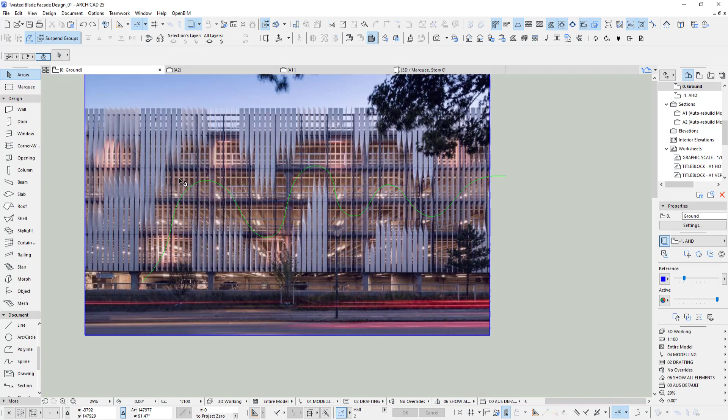The other thing is, you see I made sort of a spline wave. You can see that the facade really has a bit of a wave design. It means it twists in different stages, or twists in different positions. So that's the other challenge we have to look at.

Now I start up with showing you here, I've got a car park design just sort of ready. Very simple cars in it, just really to represent the car park. Now, if I look at the elevation, that's where we add this facade.

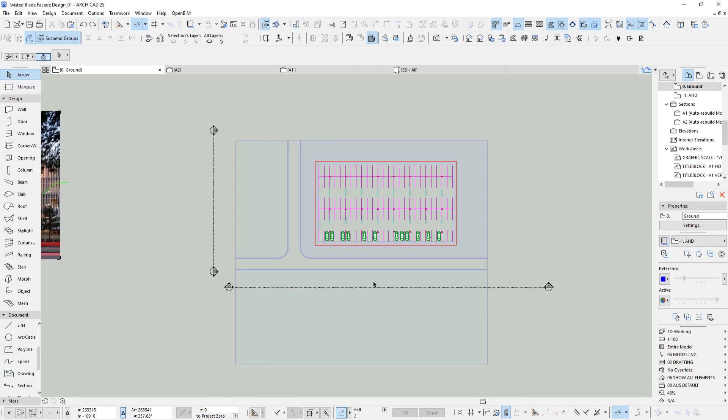Alright, cool. So to start with, I'm showing you how to twist a blade. Let me do the first blade. For this, I use the morph tool. The morph tool, the material for now, I do blades, and I simply start drawing.

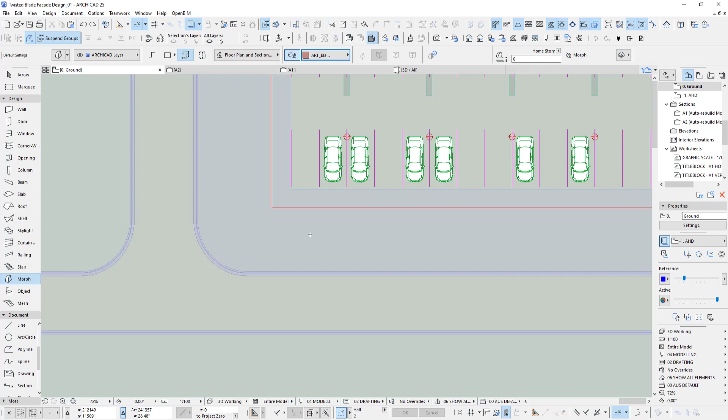I'm using this tool here. This gives me a height when I draw this morph object. Now the blades are roughly, I had a look, 400 millimeters long, and I make them 50 millimeters thickness.

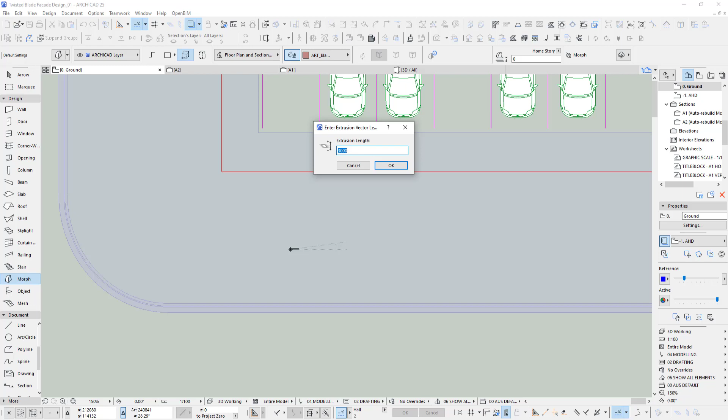So let me start drawing. I click, I go X 400 plus and Y 50 plus, enter. And now it comes up with the extrusion length. I estimate the twist to be about 3 meters. So I put in 3 meters, there you go.

Now let me go back. What I mean is the twist starts roughly there, and it starts twisting, and it's probably stopping around here. So that's about - you know, I made it 3 meters. Obviously it can be different, but for this purpose of the tutorial, I made it 3 meters.

So let me now frame this, so we only have this blade in 3D.

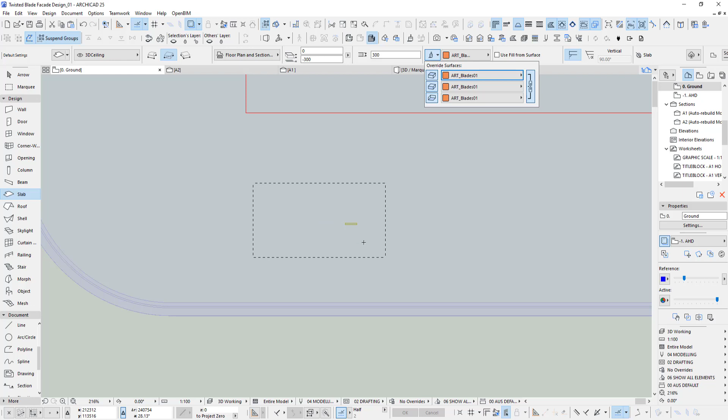Before I start drawing, I'll show you how to twist this. I drew another piece with a slab - let me do this. I go and use blades 01. You will see, if you watched my tutorials before, it's nice to have different materials - it's easier to explain. So I'm just drawing another piece here with a slab.

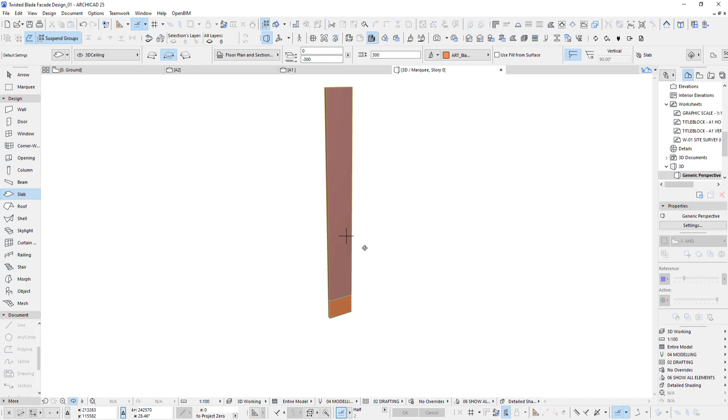Okay, and if I go into 3D now, we've got 2 pieces. I don't have to be too careful about how high that slab is - it's just connected straight down here. Now, this piece of morph, how can we twist this?

You have to go to your arrow tool up here, you change to the other arrow here, and then we go and select this. So this is selected here - it's just really that it's the surface of that piece that's selected, nothing else.

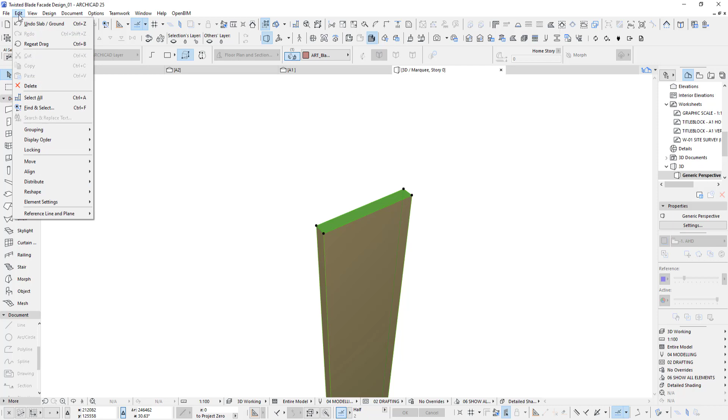Now, if you go and want to rotate this, you can go here, rotate, and you go in the middle here roughly. I'll show you - so you go there, click. I click, let me go straight here, and we now start to twist this.

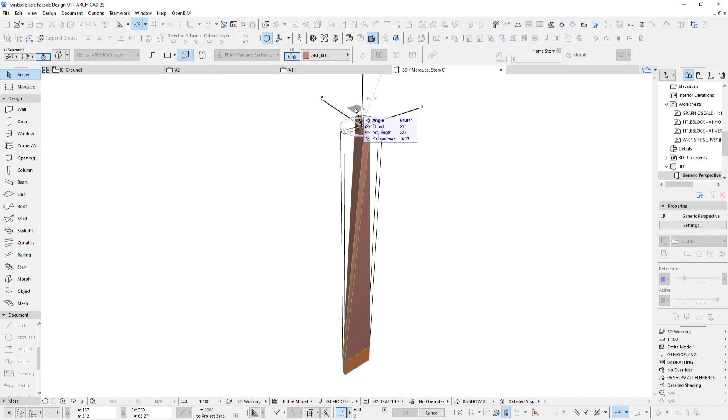Now what happened is, you can see if I twist this, I need to be able to twist it 90 degrees, so have a look what happened to it. Let me click again - that's just roughly for now, because what I want to show you is that it is not working, right? This is not working at all. So how can you make it work?

And to make this work, there's a little bit of - it's not a trick, it's just something you have to add. You have to add more vertices. So let me go back, and instead of selecting this surface, I select just this one line.

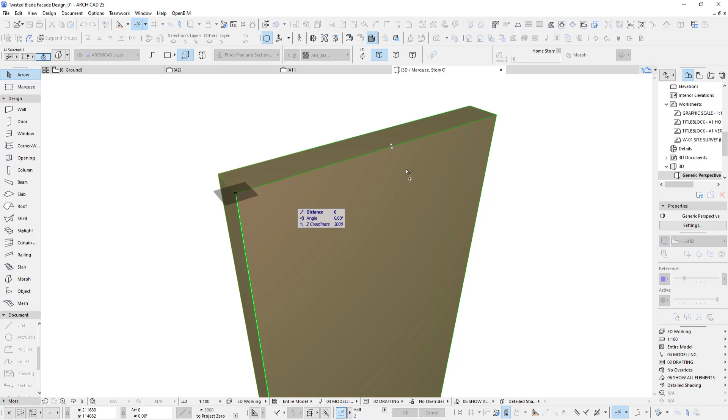Remember, you have to be in this arrow tool to do this. So I click this one, and now I multiply this line. Let me distribute - put in about 25. I don't need to pick a part before, so click OK. So I pick from this corner, it'll be distributed all the way over here, and let go. So you click again, twice actually.

So I've got all those extra vertices on this side of this piece of morph. We need to do the same on the other side, so let me do this quickly, zoom in.

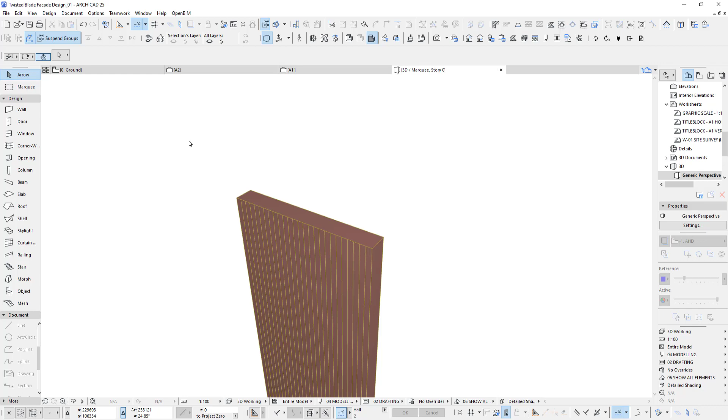Okay, now because you got all those extra vertices in here, we can actually select this surface again, and we can twist this. So let me rotate from the middle roughly, going there, and now if I move... let me just stop there for now and click again. Have a look what happens. It is actually able to twist this quite nicely.

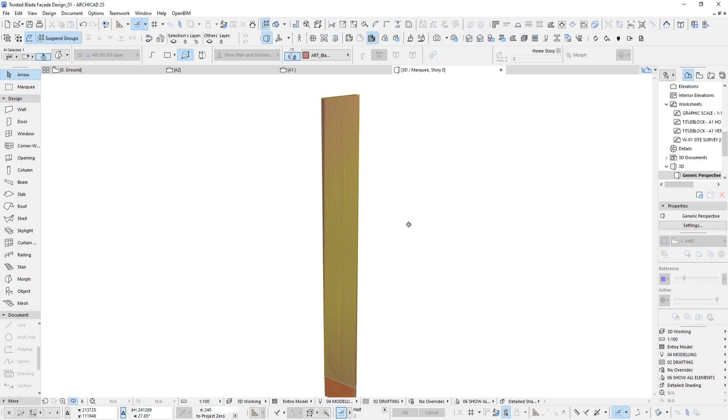Okay, now let me undo this step because we have to be more accurate in twisting. I'll do this in 2D, so I'm going back and zoom in a little bit. I'm still on this arrow tool, and I just click here to select the surface.

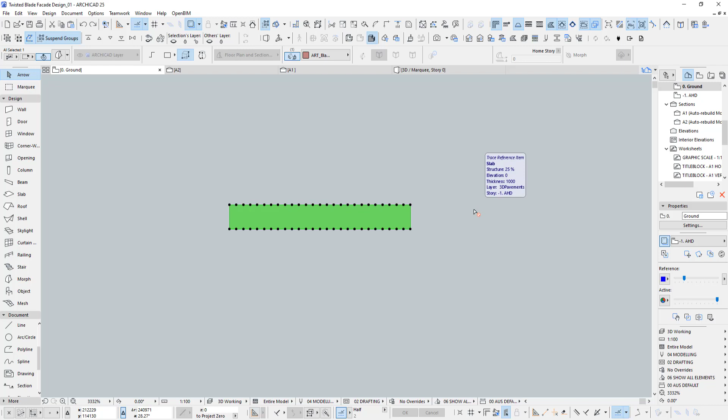Now to be able to be exactly in the middle, you would have to have the divisions we got down here. Where do I have my divisions down here? Yeah, see there it's in half at the moment. But okay, I have 25. I'm not sure anymore if this is actually really the half here. I think it is, but to make sure, let us deselect this.

And I go to line. That's the middle now. I go there. That's the middle now. And now if I go under this line, you can see, I definitely can see the middle here now. All right, so go back to the arrow tool.

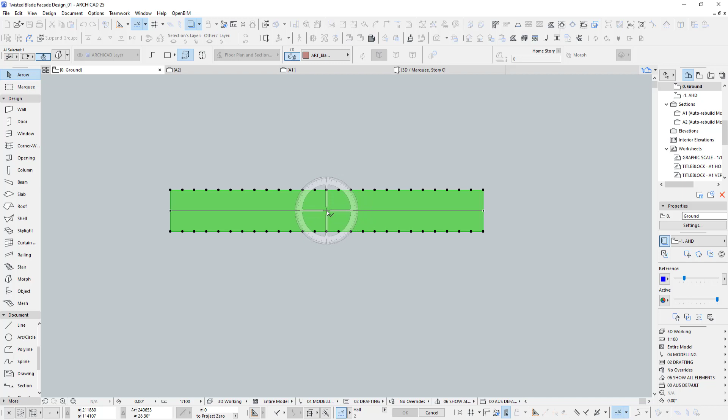We select this, that's the surface. I go to move, rotate, and now you've got to pick the exact middle. So go on this line and you pick the exact middle. Click over here, and then see I got to go now up, and now I can do exactly 90 degrees. So you go 90, enter.

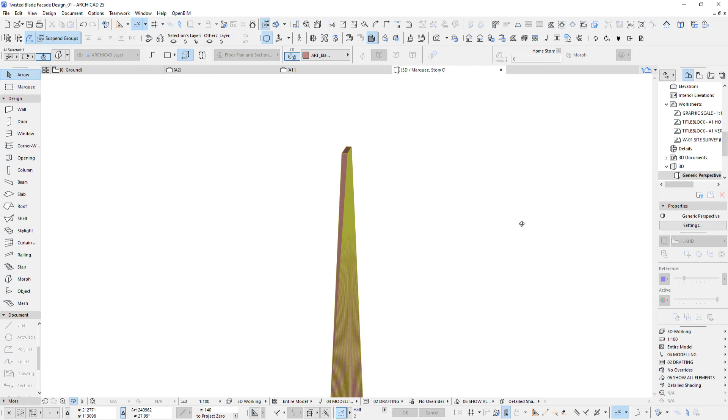Deselect. Let me zoom out a bit. Yes, I've still got the frame around, the marquee, and we look at this in 3D. So this now is really nicely, perfectly accurate, twisted by 90 degrees.

Okay, let us go to the section. I'll have this down here somewhere. There you go. Cool, that's great.

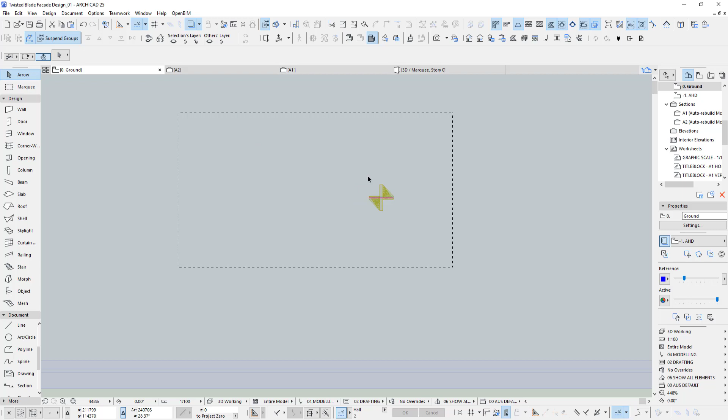Now, the next bit is, let me create some blades. So I change my arrow to that. Select them, and I just want to elevate them a little bit, like 5 meters. It doesn't really matter because I need them higher up in my elevation.

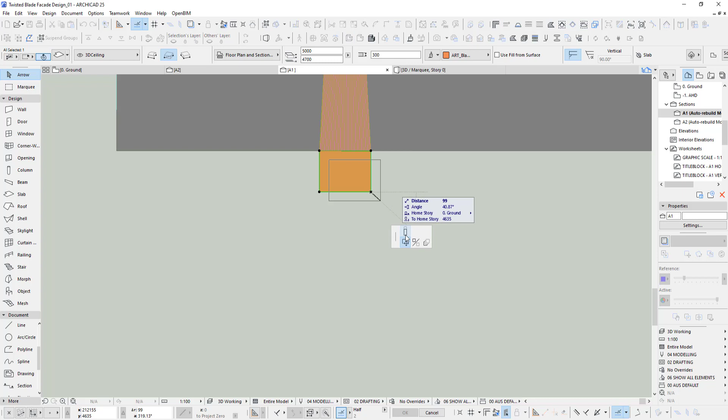There you go, great. So now because we got this blade here as a slab, let me click here, I can just stretch this down. Now you probably ask, why do I do a slab? Well, the more morph objects you have in ArchiCAD, the slower it gets redrawing in floor plan, even in elevation or section or 3D. 3D is not too bad, but sometimes on the floor plan it can get really slow.

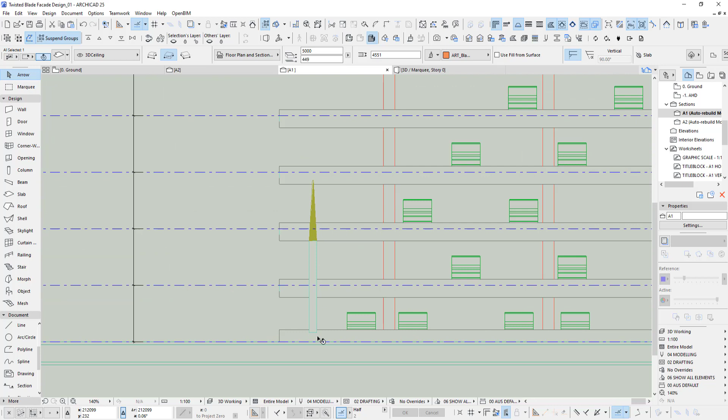So for this tutorial, instead of using a piece of morph down here, I use a slab. That's the only reason. Okay, now I stretch this a bit. Now we drag a copy over here, and we go back to our 2D. There it is, because it's just easier to see now. I can click and turn it by 90, because that's what I did with the morph, the twisted morph. And then you just draw, move this, drag it over here. There you go. Let's have a look quickly in 3D.

There you go. It's obviously not exactly in the same spot. It should be up here. Now you can move it in 3D or you can move it in the elevation. That's fine. The section, so I click and move it all the way up. There. All right, let's go to the elevation.

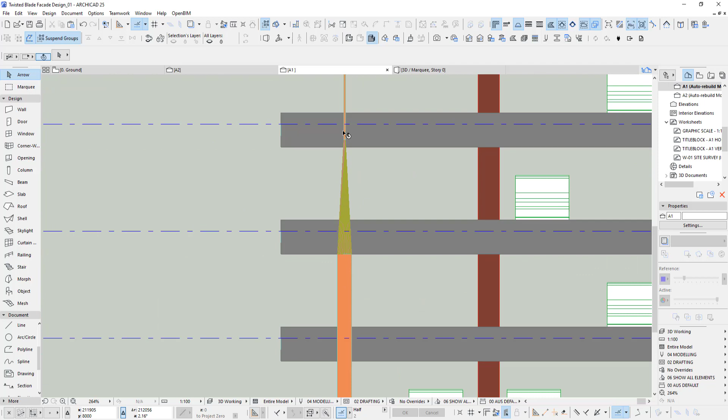Okay, so you can clearly see now we got the twisted blade going on here. Okay, let me have a look in 3D. All right, turn around a bit. There we go. It's pretty cool actually, this will be great. So you have the blade here, and if you look at the blade, keep looking at it, it'll give you a great effect.

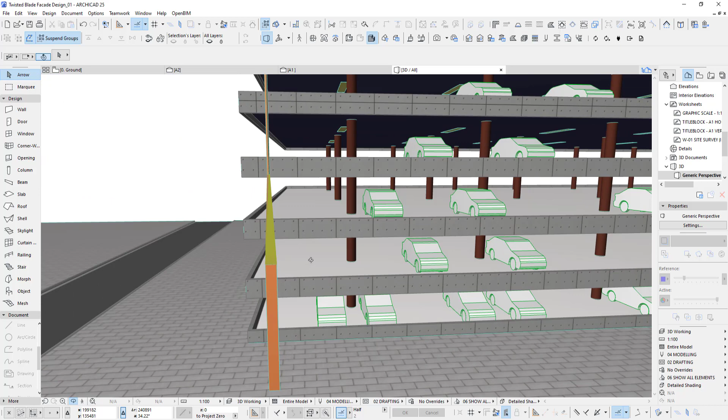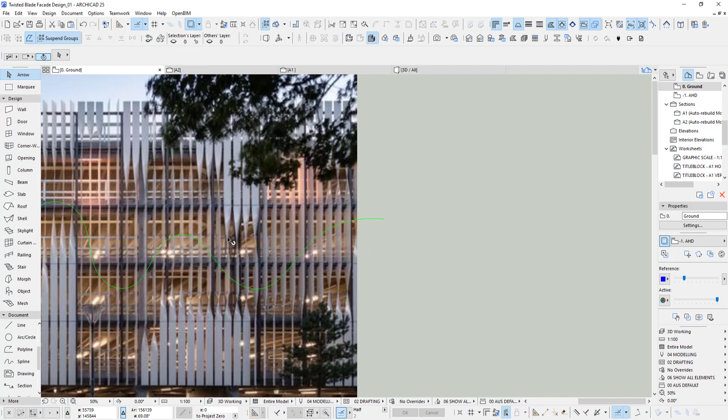Now looking at what I've got as a reference image, yeah, so obviously you have a blade. Let's just say we have a blade facing us, we twist it and we go up, and then it twists back again a little bit. That's up to you, what you want to twist. Yeah, for me I twist it and I twist it back. That's the first one I'm doing for now.

So let me have a look in the elevation. Yeah, that's cool. In 3D.

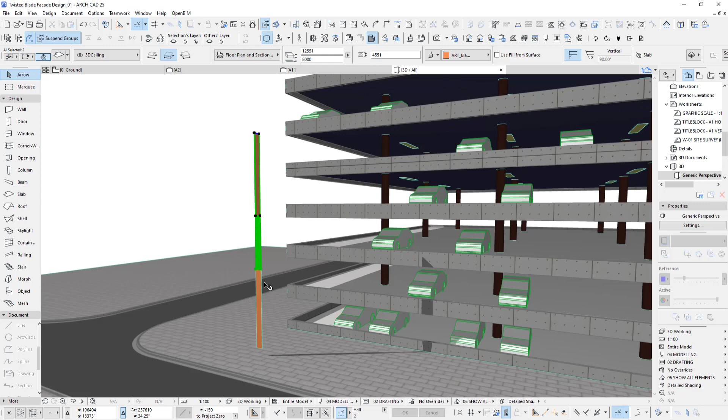Now, what I do is I like to select those two, and what I do is I just drag a copy. So drag a copy. Let me zoom in to make sure I've got it here. There you go. And you go up, and just make sure it's straight. See this line here, hold shift is straight, and we go exactly there.

Now, of course, this doesn't fit, as you can see, no problem at all. A1 again, that's a little tip.

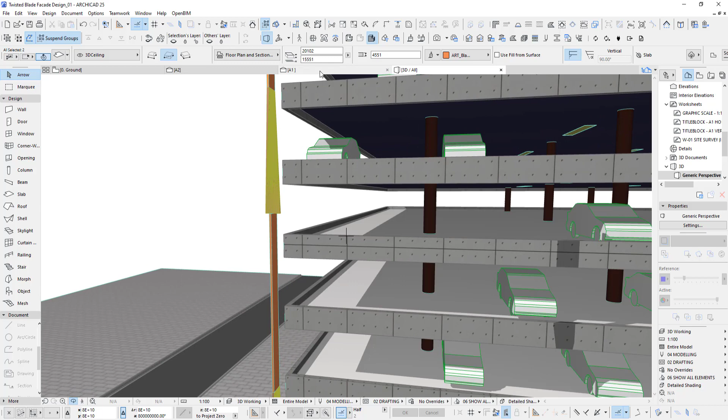So what I do now, if you go to the floor plan, have a look. So we go to the floor plan, and it's very hard to pick which is which. So it's much easier in the section.

So I'm going here, I pick this, and I pick this, and I drag. No, not a copy, I actually just drag it over here. Go into 2D again, and you'll see in a moment it goes, there it is. So now it's much easier. You just select it like this, and we twist it.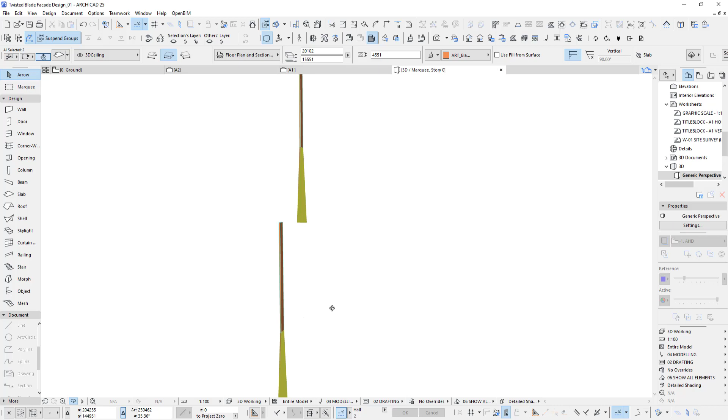How do we twist it? I have to go into 3D to make sure I twist it the right way. So what I want to do is, got the twist there, and we want to twist it back. So I have to twist 90 that way. Cool. So we go here and select, and we just turn this, roughly, doesn't matter where, because I'll do it more accurately, moving it back anyway in a minute.

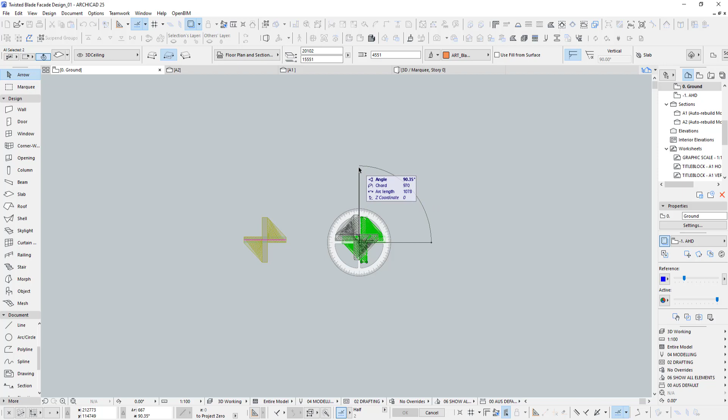So make sure it's 90. And then I drag this back. Like I said, you can just do this like that. Okay, they should be connected now. How cool is that? Let's have a look.

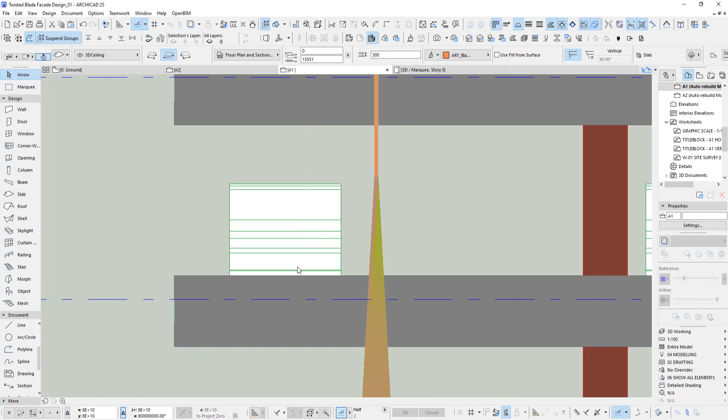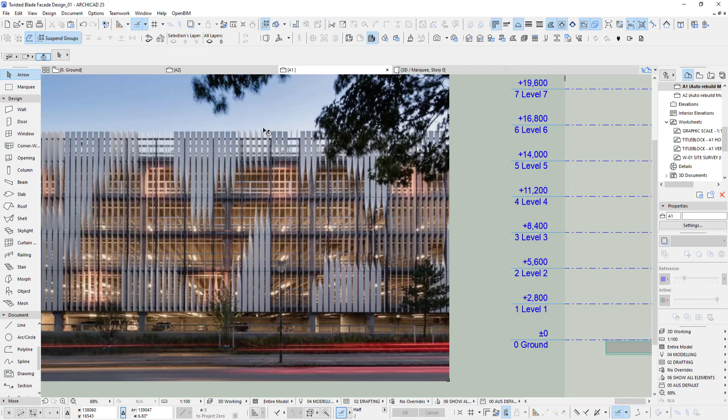A1. There you go. So you got a twist now, going straight, and it twists again. Okay, so that's cool. So if I go back here, that's one of the first twists that it twists. Twist that way, and oops, this one here. Because you can see there's a couple of them. Some of them look like only 45-degree twisted, which is great, which I'll produce later.

Okay, let's go back here. So what's the next step? I really like to make sure that I have a couple of different twists. So the easiest way is, let me just copy some.

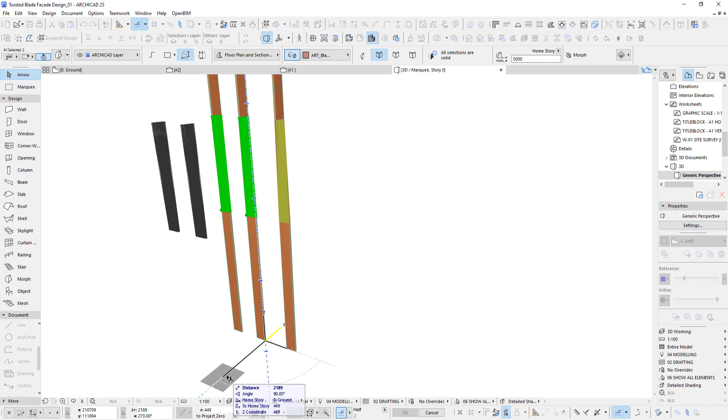All right, cool. Okay, again, what I do is I take those two. Let me just select this one, and we select this one here, and I just drag them away. Let me drag this from there. It doesn't really matter. If you have the blue line here, that's 90 degrees to it, which I think is better.

Okay, and we go back to 2D. And we should find them hopefully somewhere. Oop, that was a bit far. Never mind, so those are the twisted ones.

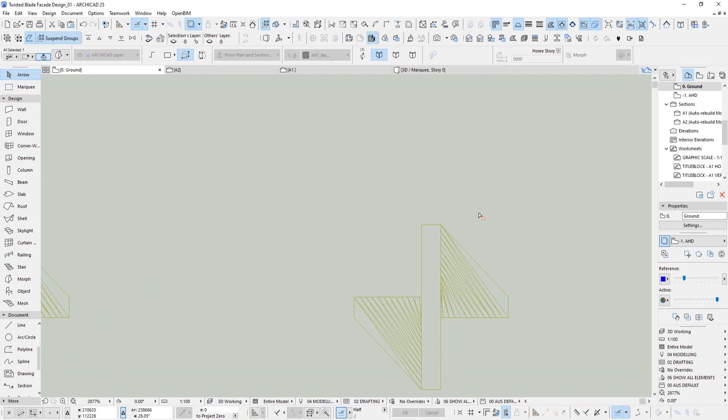So what I like to do now is we go back to our white arrow. We select this. Oops, we gotta make sure we select only the face of it. So let me deselect this. Face, yeah, that's the face. Now again, see that comes for, I need to be exactly in the middle. So you have to do the same again. Take a line.

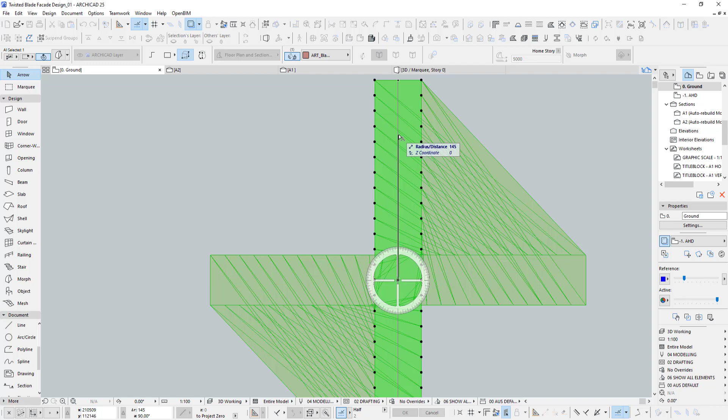And I choose again rotation, going to move, and we rotate. Go exactly in the middle here, click, I click there. So we have a 90 rotation. Let me go 45 now, so that means I go back 45, so minus 45, enter.

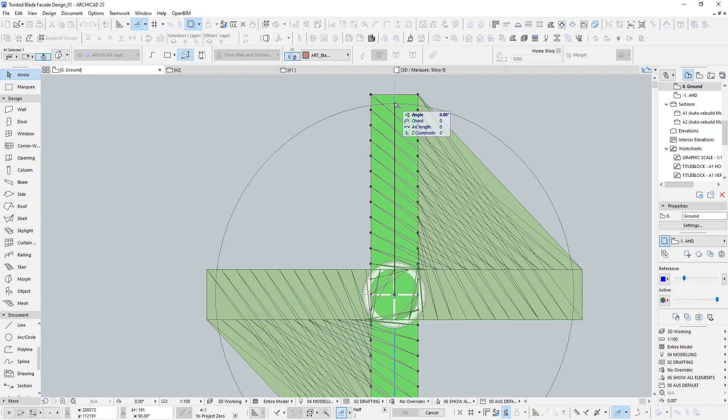So that's cool. And the other one here, not sure, I can't see how much it is, but let us just do another one, maybe 30 degrees. Okay, that's pretty good. Let me move them back.

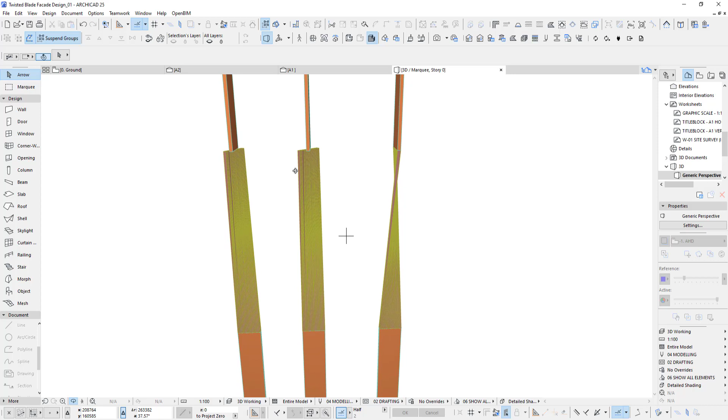Actually, we can do this. Switch to the black arrow. Yes, so you can see those are the two different blade twists I have extra now. See? So I've got the 90 degrees, 45, and 30. It's just a little bit of randomness. I like stuff like that, and I think it looks good too.

Now obviously we have to use the same one up here. Let me just select those ones, and we don't need them, so those two I can delete. Great, and I have to adjust the twist of those ones.

So to make sure I know which one is which, let me again move that. So very simple, select and move. And then you go back to your 2D drawing. I do this a lot, it's just easier to find where my models or model pieces are. Okay, oop, there they are.

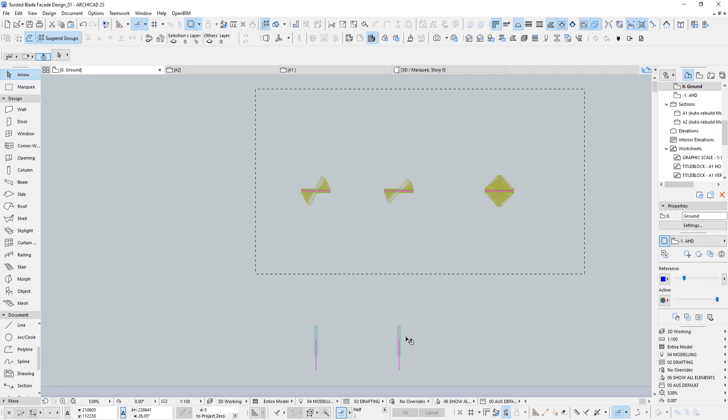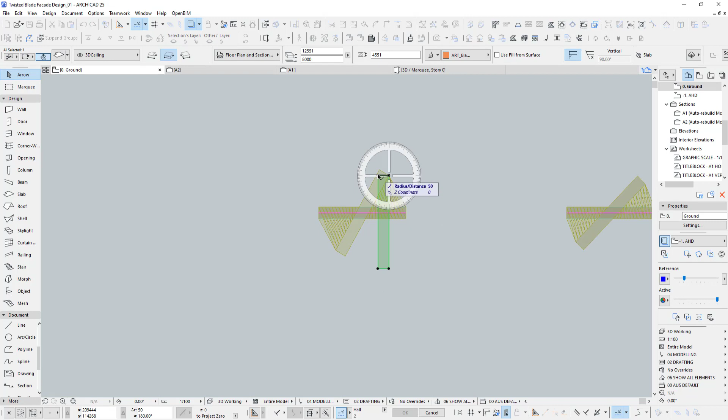So all I do is click and drag it, and oops, do it again. Click, hold my left mouse button, there you go. Drag it there and rotate it to fit this. Alright, how's this looking now? Let's have a look. Beautiful, it's great. Everything is connected correctly.

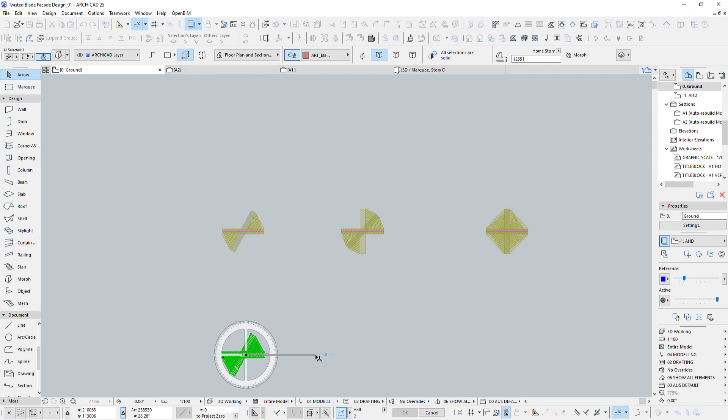Now the next steps are the same again. You make sure you copy them up, move them a bit so you can see them in your 2D, turn them around, go back to your elevation, and there again rotate them around to make it fit, just like the first blade we did together. It's all done and it looks pretty cool.

Now if I go to my elevation, all right, they're all ready to go, to be moved around and to be stretched, because you will have to stretch some of them. Okay, so let me go back here.

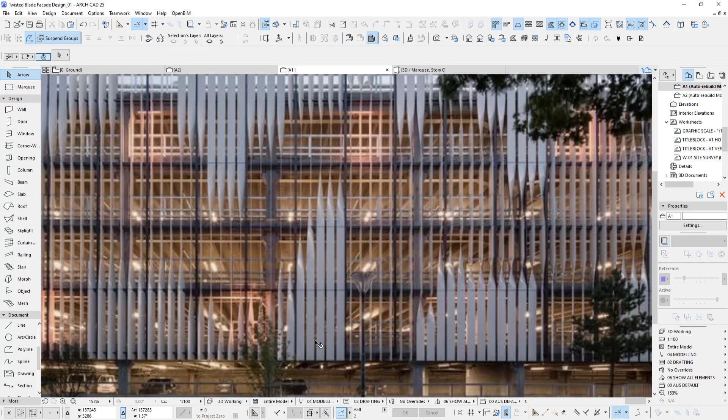So what happens is, some of them you can see, they have the same blade here and it just gets longer and longer. Then some of the gaps are different. See, this is a longer gap, a thin gap, and then it twists back a little bit.

So that's the randomness. So what you have to do is first, I just go now and select some of the blades and just copy them along. As an example, let me just take this. I will now group them.

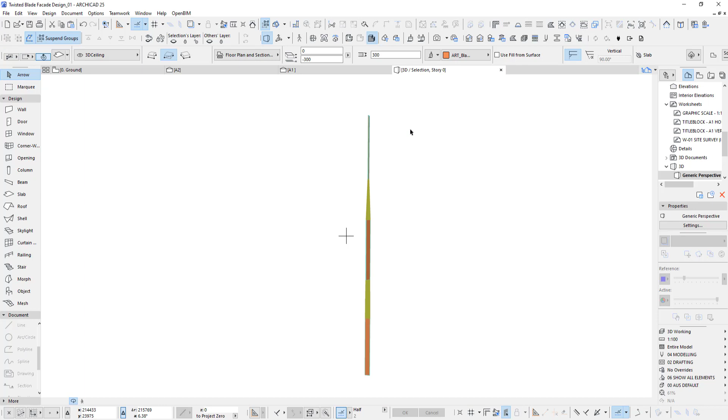You can't group in section. I've got Archicad 25 open at the moment, which is a bit annoying. So I've selected now, I'm going to 3D, and here you can select them again. And now I can group them. There you go. It's very odd, but never mind, that's the way you have to do it. So let me do those two.

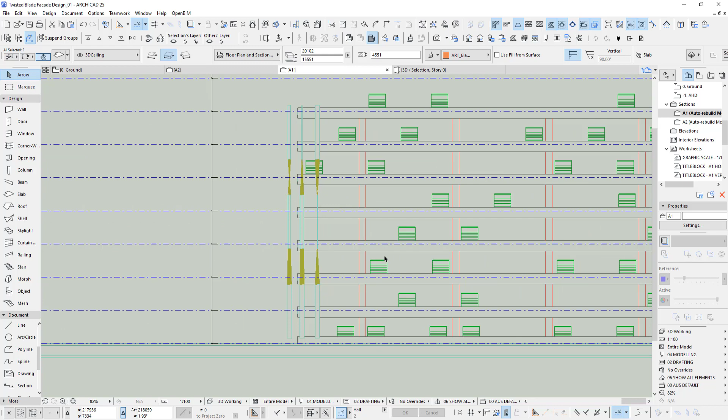So what we do is now we move them along and then we will stretch them. So let me take those two and move them a bit outside first.

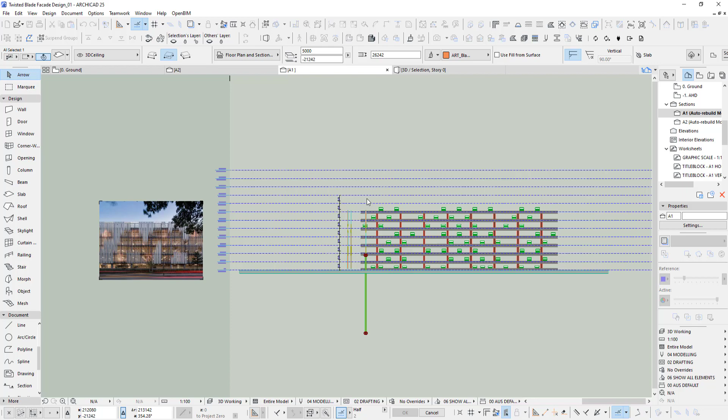Before we stretch in here, what I recommend is this now. So suspend groups, you take this and you make this longer. I mean longer. Don't worry, this will be all good at the end. So we stretch them up, just like this.

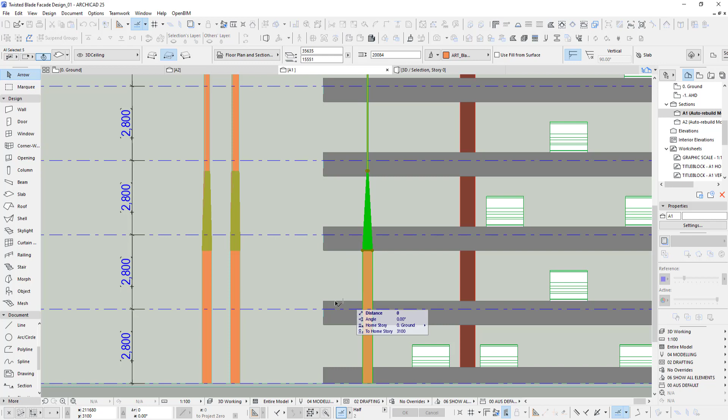Now let me start with those. Remember, they're grouped so I can move them together. Let me start all the way over here. There. Now the gap, I had a look, it's roughly about 150.

So what you can do is we just multiply a couple of them for now. Let's make it spread, because I know they are 400 wide. If I add 150, that makes it 550.

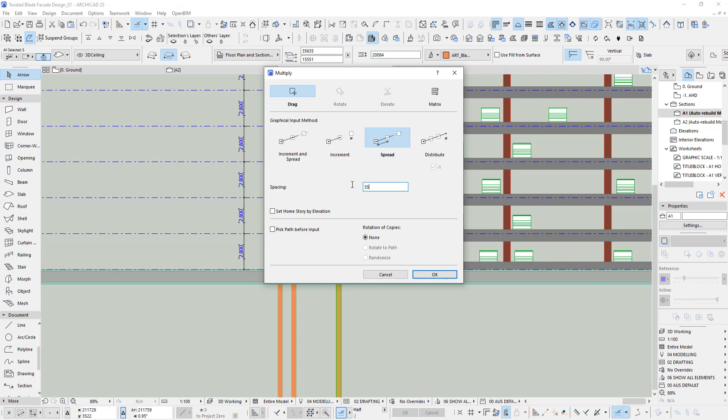Okay, I mean, it doesn't matter where you click, you just click somewhere and it will just copy them along at the exact distance I want to. All right, see, that's the first step you do.

Now the next step is make sure the group is suspended, and then you need to stretch them. The problem is with stretching that we can't really stretch it in the elevation, at least not with the marquee tool. It just doesn't work. It works in the floor plan, but not in elevation or section.

Now I give you two options to do this. First option is you keep it as is. Like I said, you have the part of the blades as slab, which makes it very fast redrawing in the floor plan. If you want to do that, what you have to do is you just select those two as example.

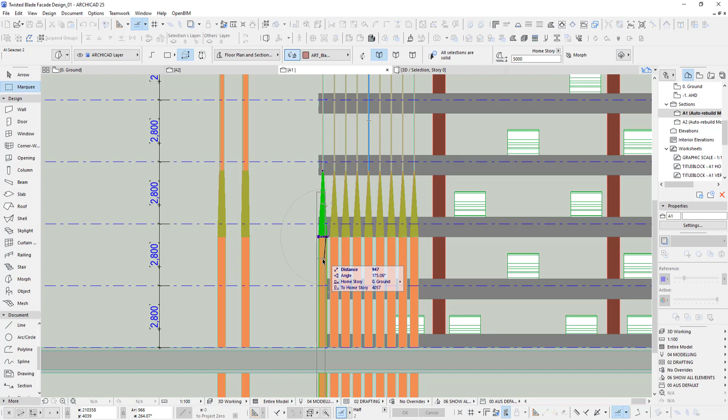Let me drag it down a bit. It doesn't matter how much, it is up to you. This is purely now designing it by eye. Let me drag it a little bit. Okay, so I did drag this down. Now because this is a slab, I can just click, move that down to here. Okay, so that's the slab.

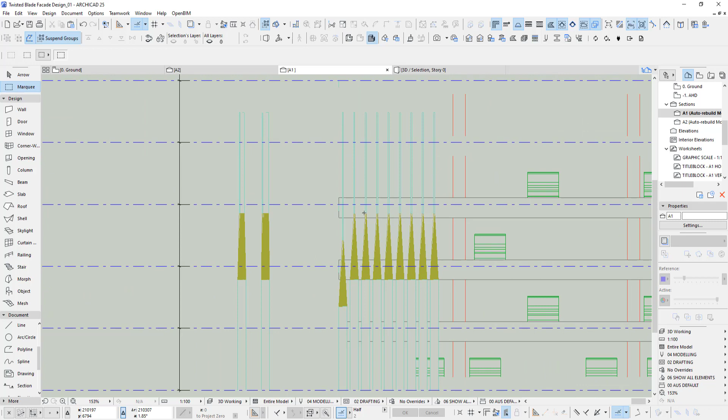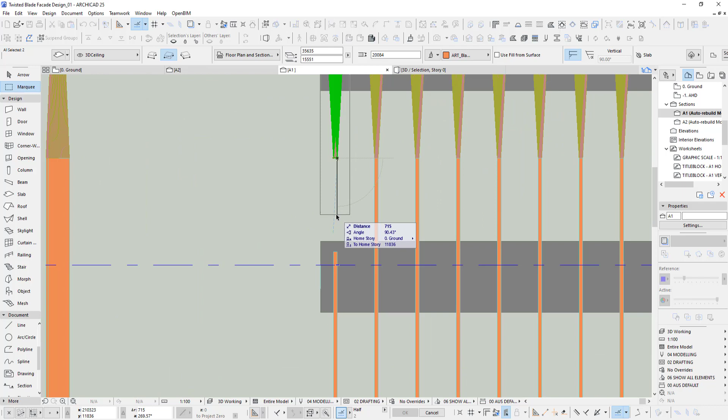Yeah, all good. So you see that's the first stretch, and you could say, okay, I want to stretch this one down a bit. So we go here, stretch it maybe till about there. But that means now I have to click, and then I have to drag this down. As you can see already, it's a little bit more work, but it's fine. It does work just all right.

Now the second option I can give you, let me select those. Okay, yeah, so they're all selected now. So what I do is I'll convert them to morph. That means you won't have slabs anymore. So we go convert selection to morph. I know there's some morphs already there, but that doesn't matter.

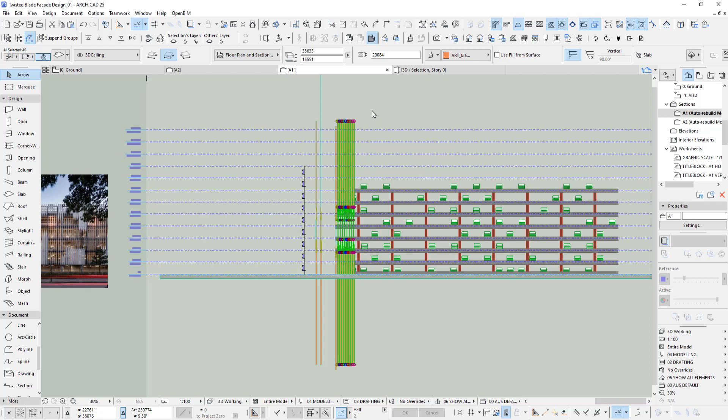So just hit OK. Now let's go to the floor plan and move those blades away from the actual car park. And I will extend my section so I can actually see them. Okay, A2. Alright, they must be over here somewhere.

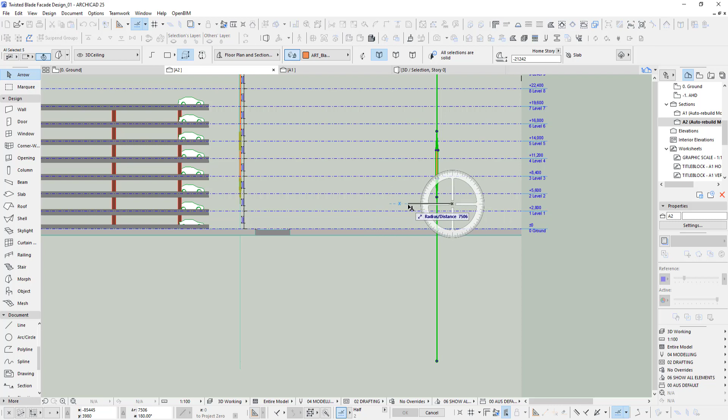There we go. So what you can do is now you select and you rotate this. Because they're all morphs now, I can rotate them by 180. Go back to my drawing, floor plan.

Now you zoom in. And what happens now, because they're morph, let me suspend groups. I can use the marquee tool. And you can see now, this will go faster. So what I do is here, I'll draw there. And I just stretch them down.

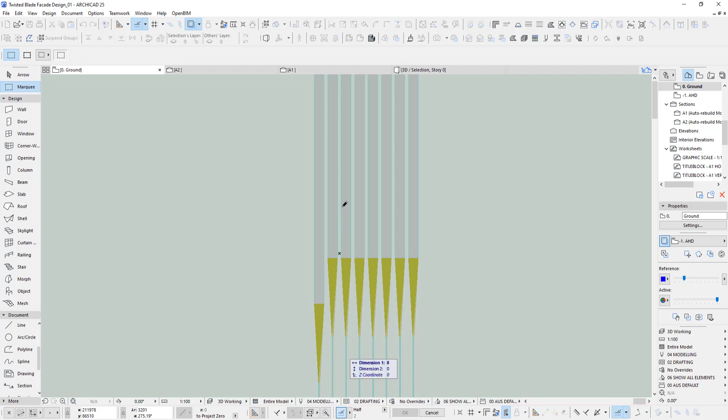Right? And because they're all morph and then the ground floor, this obviously is a lot easier to stretch. So I can now go there, go down here. But you can see the redraw, it's just the way it is in Archicad. The redraw is not as fast with morph. So you click. Let's move it up a little bit.

There you go, you can see this exercise now is obviously much faster because I can stretch in one go. So those are the two options you have to get this facade a lot more random. It's up to you which one you do.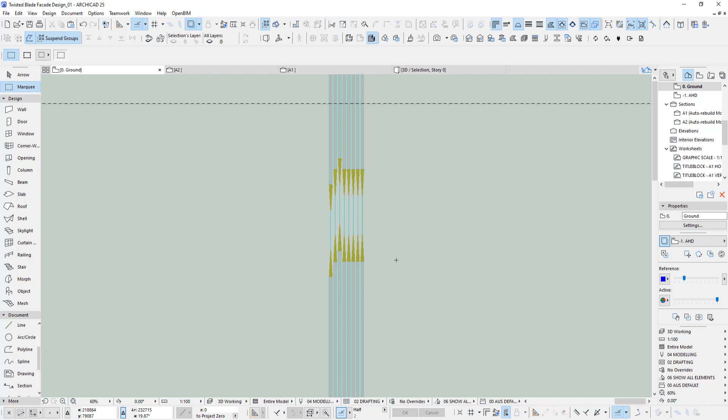Okay, so I opted to go with option 2. As you can see here, I copied and moved stuff around, I did stretch it, and I got one facade ready for my car park. Now before we move on, you can see I did, as a guide, a little spline here. And that blue shade or blue fill you can see, that is actually the exact size of my elevation of the car park.

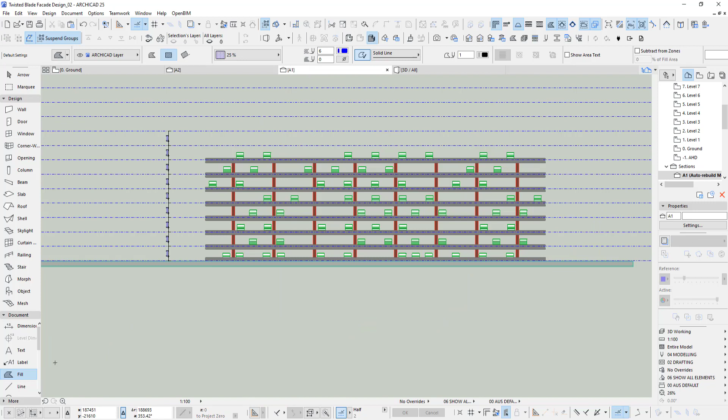So if you go here, that's this size. All I did is, let's go back, I can just delete this. So all I did is I go in here, go to the fill, and I draw a fill. Now you select that fill again, you don't need it in here, so you can just go to cut, go back to your 2D view, and let's just say maybe around here. Now you paste, and you'll get an option here. It will tell you to paste center of the current view, original location, keep current view, or zoom to pasted elements.

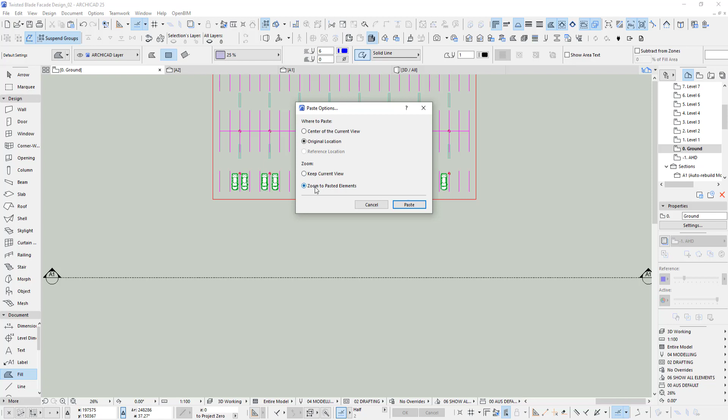So you just go to original location, and zoom to pasted elements. So I paste, and it pasted down here, and I just click outside. Obviously I already got all my elements here, but just to mention, if you've done it before you did the elements, all the elements would be empty. I would have just this fill here. I added the spline, and then I would do my elements.

Okay, so that's a great little option to make sure you know how big the elements will be at the top and at the bottom, because we need to cut them off obviously. So which is quite easy, all you do is...

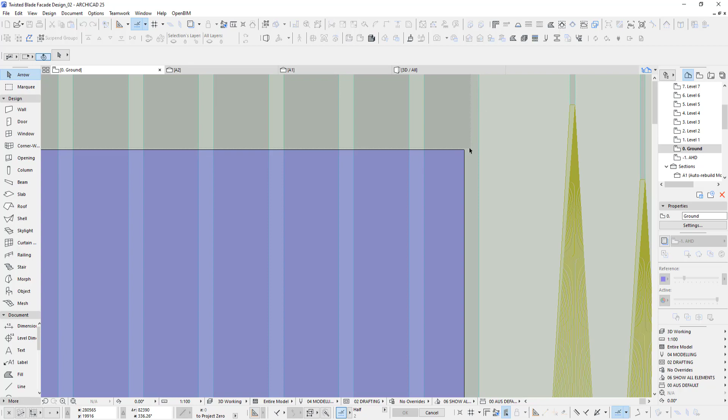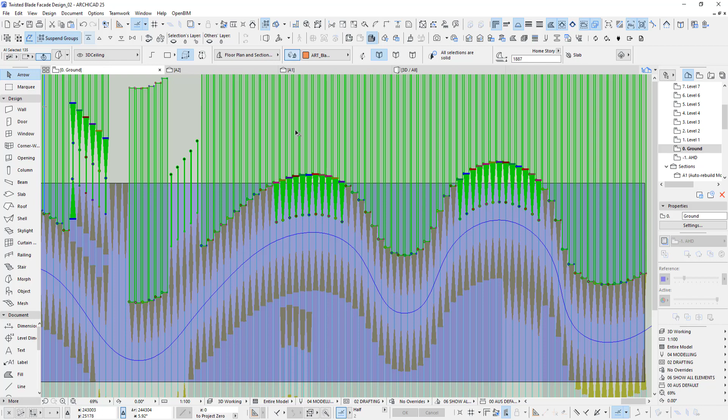Let me go here. So I take my arrow tool, and all I do is I select, zoom in, and go just above your fill. Just above, that means I select everything, because some of them you can maybe see there's even this tiny bit down here I need to select, because you have to be in suspend groups just to make sure you don't select stuff you don't want to. And now this is selected.

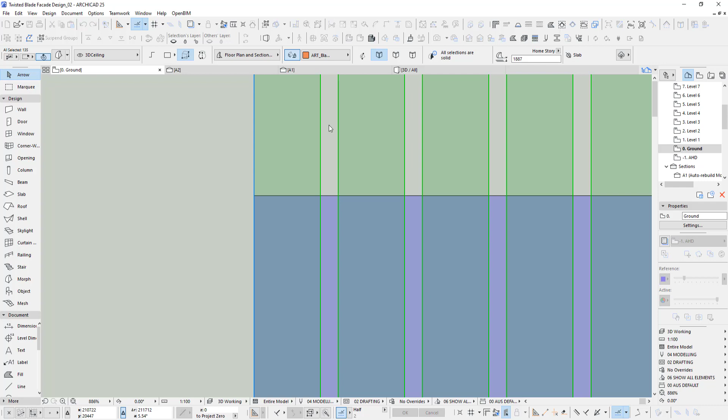We simply go to the cutting tool, zoom in, you go there, you get sort of the Mercedes icon, or you just click and click, but usually I just go to this Mercedes icon. I click, and then I want to cut off this way, click again, and it will cut everything off, and we just hit delete. There you go, same with the other one.

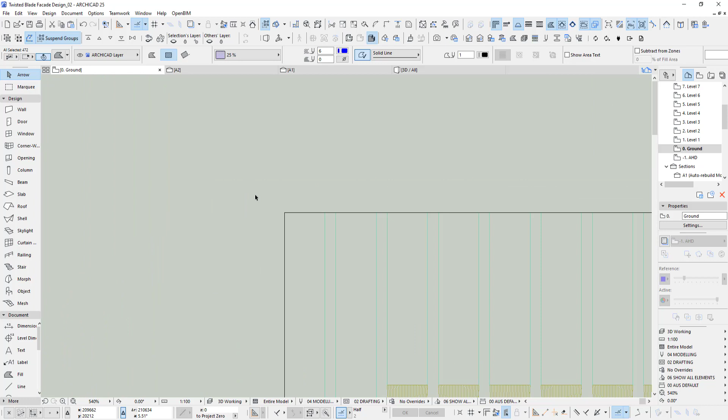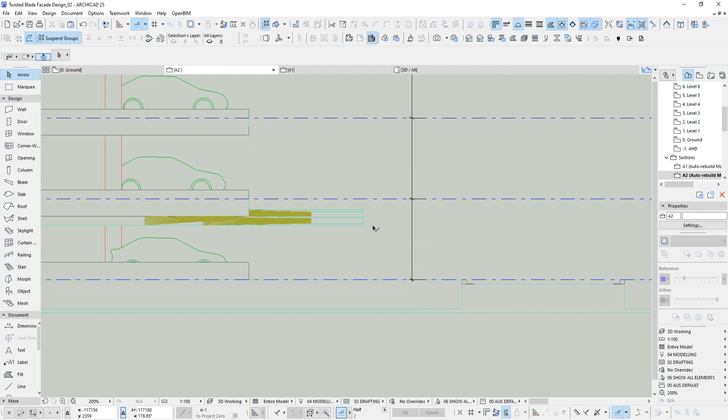Great, this is cool. So what you do is select everything like this. I do like to unselect with shift click my spline, and I don't really want the fill with it either, so I'm going in between here, shift click, so I unselected the fill. Now I go and group, everything is grouped, and now I can move this a bit towards my car park. There we go, and all we do is we drag this down there. Should fit because of the fill I used.

Yeah, see, perfect. Let's look at A1. It obviously has to recalculate, but I like it. Very nice. So if you go back here, have a quick redraw, and let's use the marquee tool just quickly to see what we got. All right, see, you got one of the facades ready. And the effect is quite cool actually.

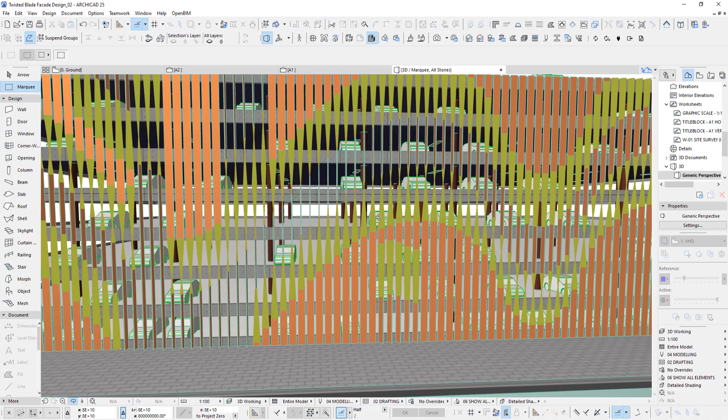If you go sort of close by, you can't see in here at the moment, but if I start moving straight out, look, you can see all the cars, and then you move around, you can't see any cars. If you drive along the road, this is actually quite a nice design, because it does hide the car park, because you don't really drive along the road looking that way. Anyway, so now obviously you just do the other sides.

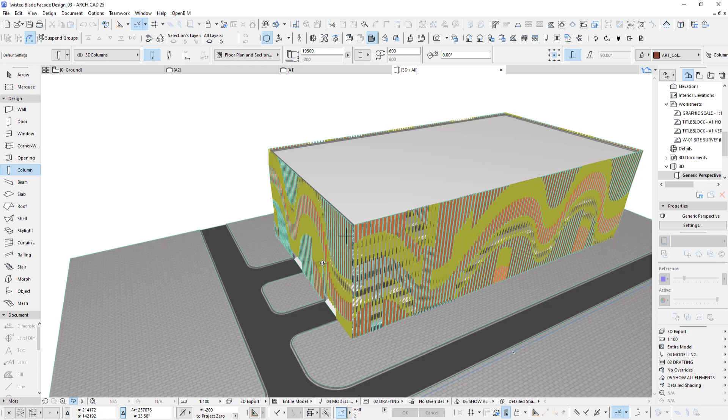Okay, as you can see, I did very simple for this exercise. I did actually just mirror that elevation to the other side, and I made a copy of this elevation, moved that corner to this corner, I turned it 90 degrees so it's that way, and then I just deleted the rest. And to do an entry of the car park, I show you very quickly.

What I did is let me go to working. So all I did is I added 2 pieces of slab. There you go, I put them on a different layer. I call my layer cutting elements because I cut with those. And all you do is you use the solid element operation. So if you go to solid element operation, you select the pieces you need as targets. This slab here I can select as operator, and I do a subtraction, I execute.

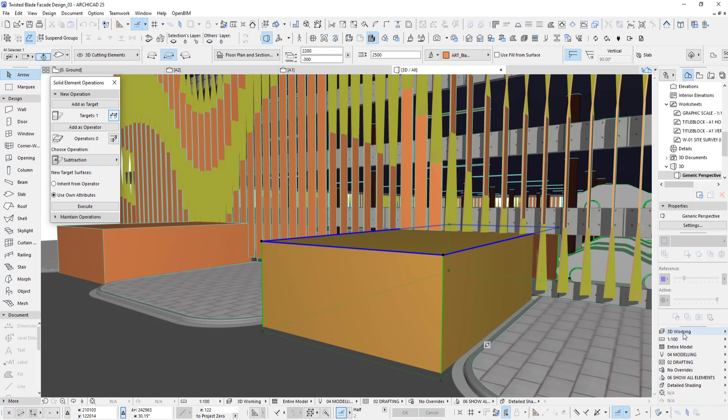That's all I did. So if I go back now to export, turning the cutting layer off, there you go. And you can see beautiful, everything is cut off, including even I had the wall here going along before. All this is cut off and it looks perfect now.